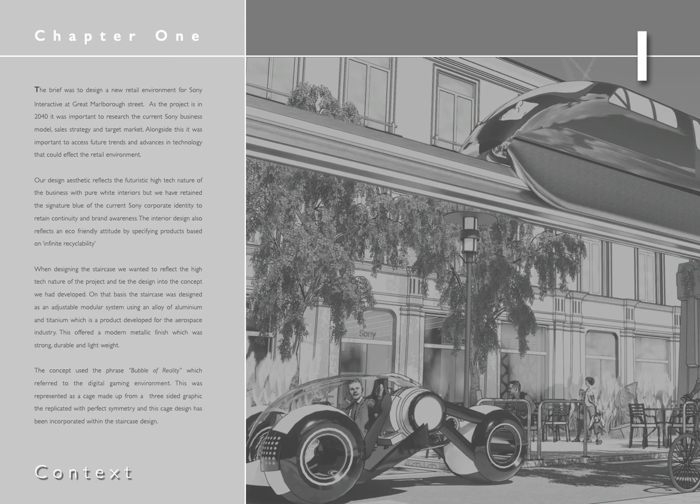The staircase project. As you see, I've started to build up the graphics for the portfolio. I'm putting a context page in here just so the staircase is in context with the interior. I thought it was quite important.

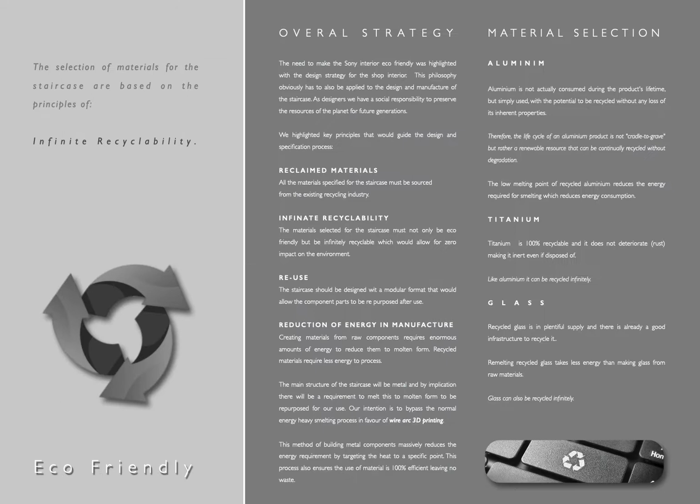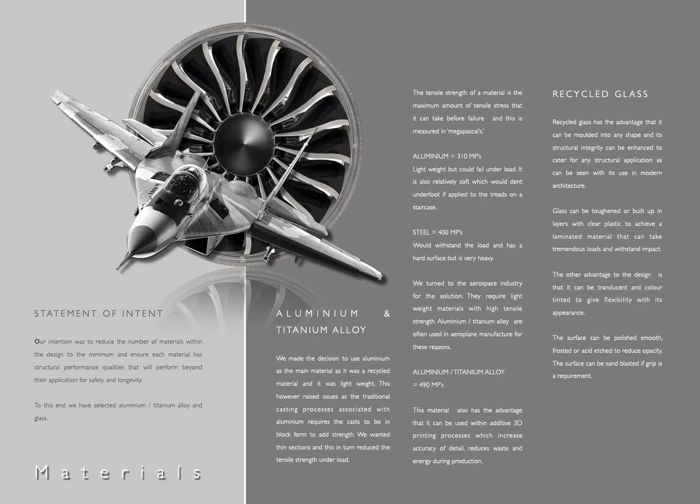Research-wise, I've looked at the eco-friendly elements. I've looked at materials. I'm going for sort of aerospace type materials, lightweight and strong. As discussed, I've looked at the process. So we're looking at the large 3D printer, so I'm looking at designing around that.

Then you told us to look at 2 staircases. I've actually looked at 3. I've added the Foster and Partners staircase for Apple in New York as well, because I think it's quite relevant. So I've done the Aalto, the Mies, and I've added the Foster on as well.

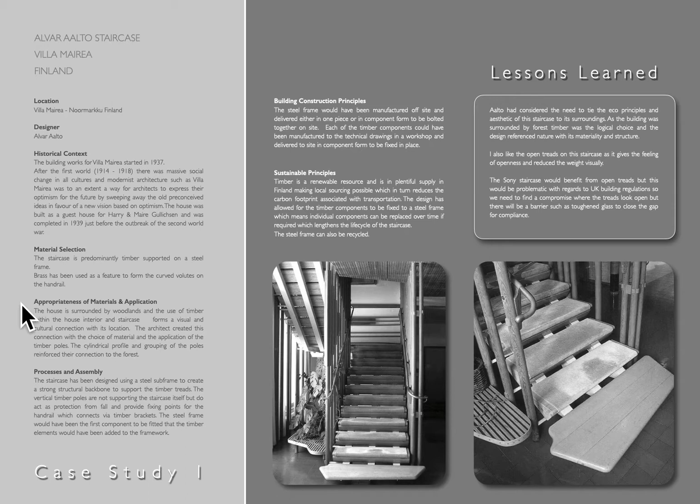So I've just condensed that case study onto that page there and looked at lessons learnt here on the right hand side. So these are the lessons I'm going to take forward into my own staircase, if you like. The same format here for the Mies staircase, and the same format for the Foster and Partners staircase. Then I go into design development.

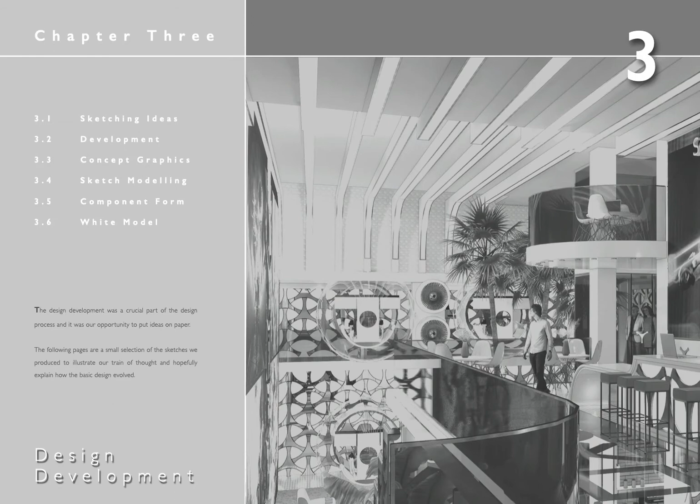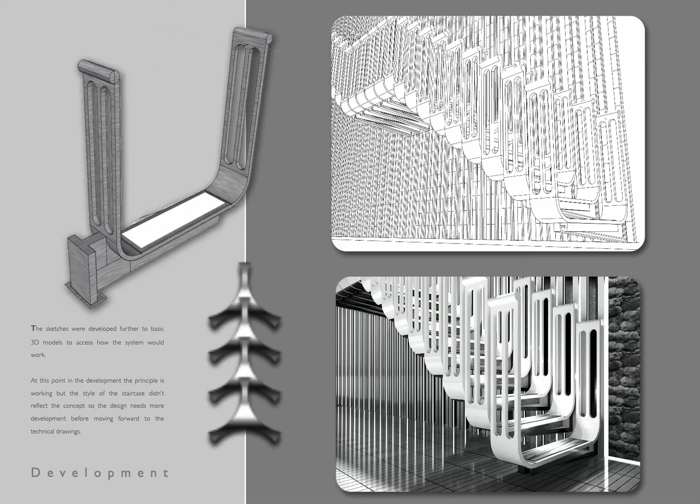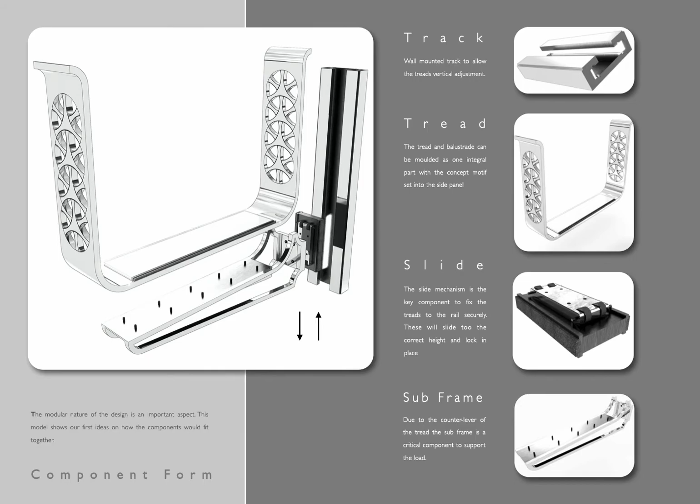I've pulled together the sketches, so I'm just illustrating where I started with these very rough sketches and rough ideas, how that developed forward. And then I wanted to introduce more of this graphic in. So this is one of the early drawings, just showing the graphic on the staircase, and ideas on how the staircase would be assembled. And then I've put a white model in just to show the outline of the staircase

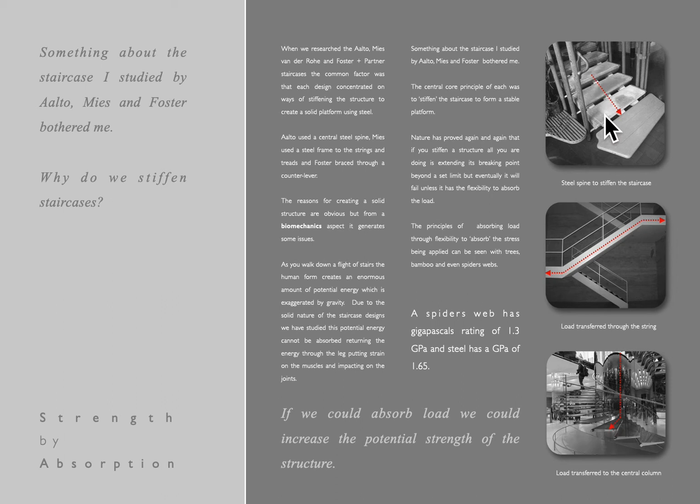within the room. That was the point I was more or less going to finish, to be honest with you, but when I went back and looked at the research on the Mies and the Aalto staircase, and even the Foster staircase, something kept nagging me. And it occurred to me that the one real common feature was they were all stiffening the staircase up. Aalto here was stiffening up with the steel beams behind the steps. Mies was forming this sort of brace with these solid steel structures, and Foster was using this cantilever technique.

And it began to occur to me, is stiffening a stair a good thing? It sounds sensible, but when you look at the biomechanics of it, you've got an awful lot of potential energy as you walk down the stairs. Because you're on a stiff staircase, it's got nowhere to go, so it comes back up through the leg, through the muscle, through the joint. And it seems very counterproductive.

If you look at a gym floor, for instance, it's sprung. So I came up with the idea of, could we introduce some kind of spring into these steps? Not enough to make it feel wobbly, but enough to take the impact and soften it. So I developed that idea a bit further.

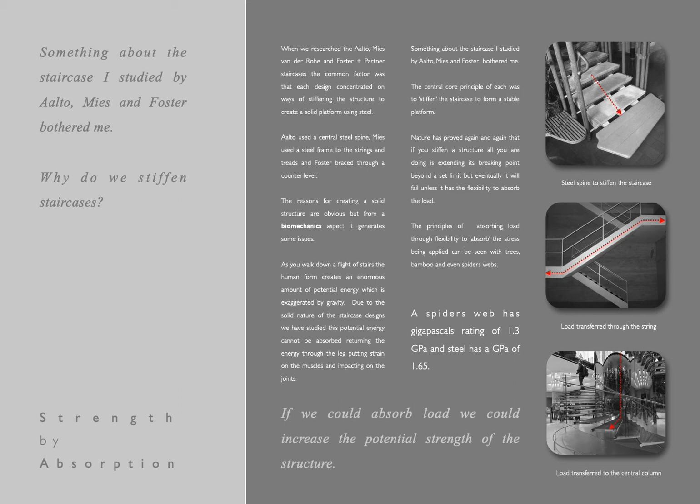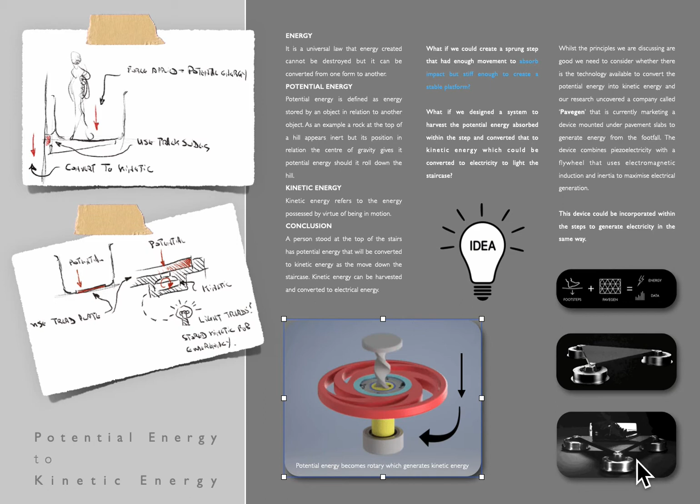Sketching ideas here, I thought, well, if we can take something that absorbs that kind of energy, why can't we use that energy? This is a very basic spinning top. If you put that underneath a tread, so that as the tread came down, we got that rotary motion, we could turn potential energy into kinetic energy. So, why not? Did a bit more research.

I found this company called Pavegen. Pavegen are already doing it. They've got these micro generators fitting underneath the pavement, so as people walk along the pavement, they actually generate electricity. I thought it was a great idea. It's already on the market, so this is something I could do.

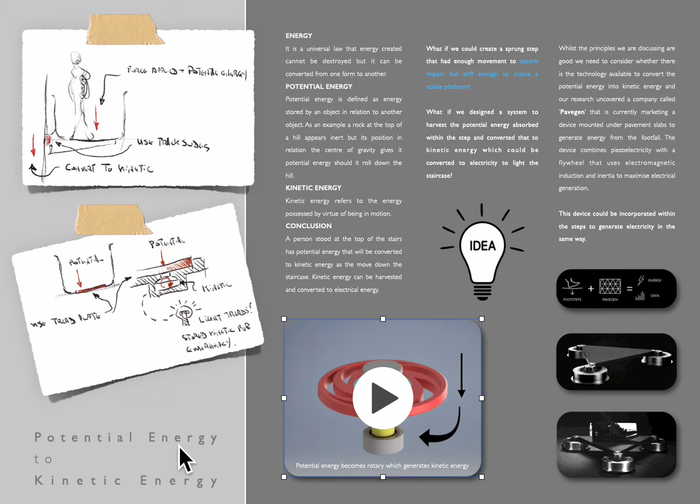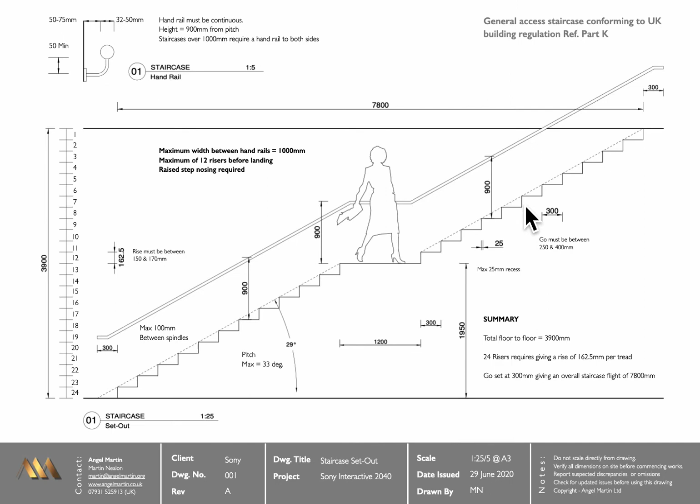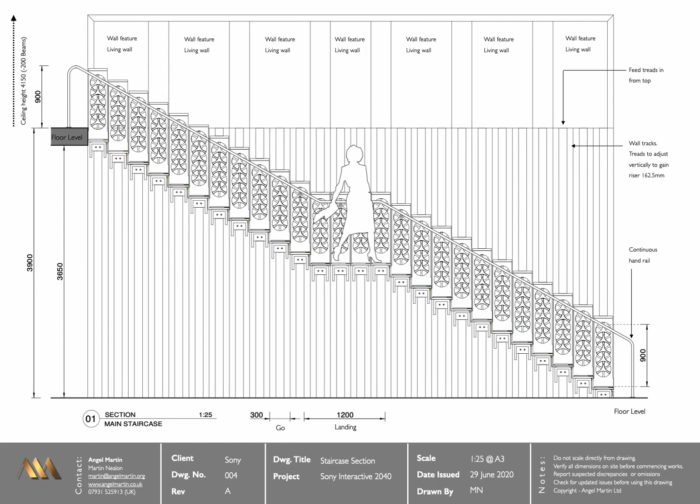So going forward, I'll quickly run you through the drawings so far. I've done one drawing here condensing all the relevant building regs information: the stairs, the rise, the go, and the various regulations. Done the main plan. Elevation, I've still got to add notes to these. A lateral section through. More elevations.

I've solved the riser problem by putting a glass riser in here, so that we can conform to regs with this staircase. The whole thing's had to virtually be redrawn. It's amazing, all these little alterations. It was just easier to redraw the damn thing.

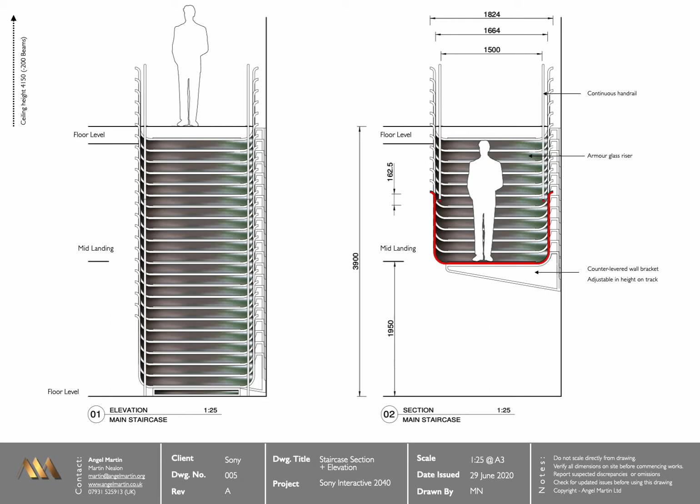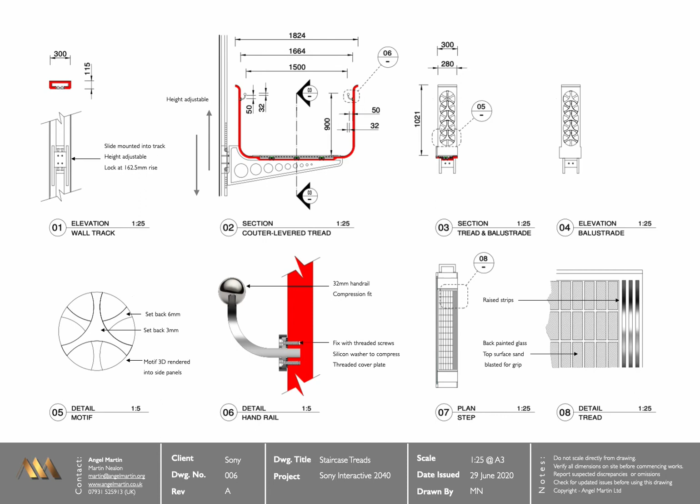Done quite a few details there, so I'm starting to see how we could use sandblasted glass here, how we could raise the treads at this point, how the handrail would work. That's looking at the idea of converting potential energy to kinetic energy. So we spring-loaded this part of the step here, and we could have that generator underneath. That's the glass riser in the back, which is backlit. So I've done quite a lot of detail on how we could actually do it. That needs developing a bit more.

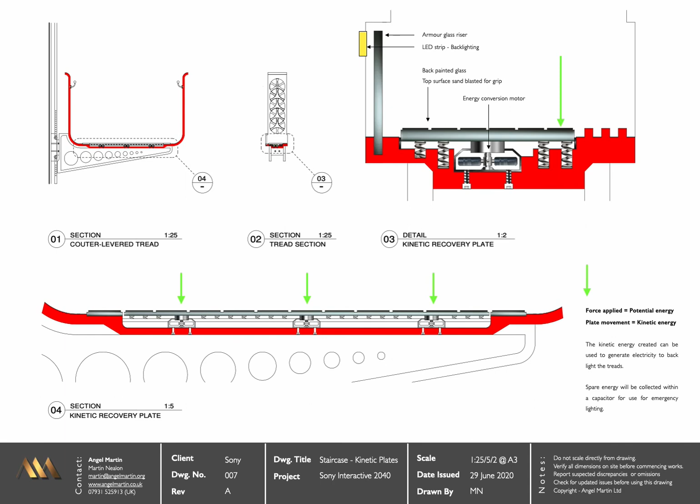I worked at the model. I've sent that away for 3D printing now. So that was the 3D printing model I've sent the guy. More details on this slide mechanism that I designed, because I want all these stairs, instead of being fixed, to adjust into position so that it's very much a modular system.

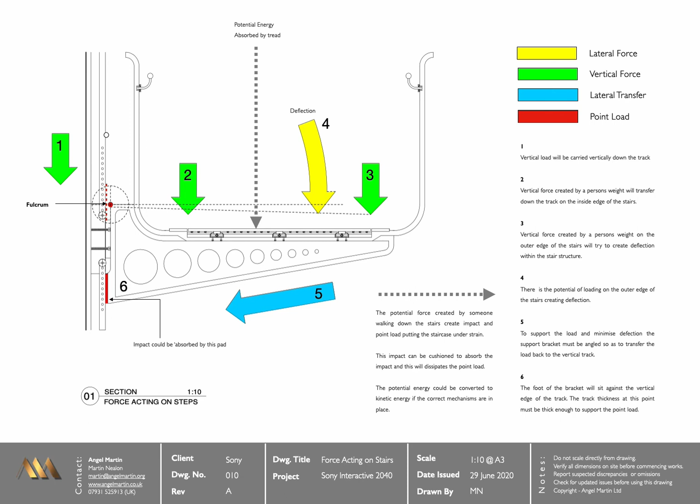I've looked at all of the loads, the load on the track, the load on the outer edge, how that would cause deflection, how we need to redirect that load back through the brace underneath. I'll probably take the lift out. I presume you don't want that.

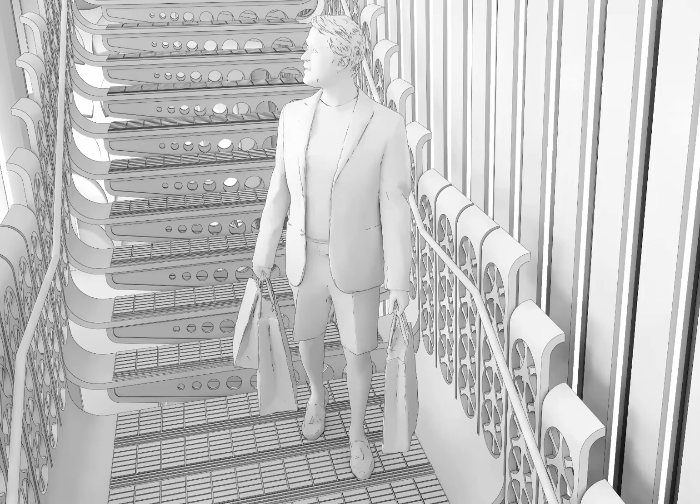And then, just in the last minute, I've started to do a white model. This staircase has been completely redrawn now from the original drawing, so this now matches the technical drawings exactly. So white model, and so on.

I started to look at colour drawings. Not totally thrilled with these. They need a bit of work, but the basics are there. You can start to see all of these reflective materials working now. I have to play this back in slow motion.

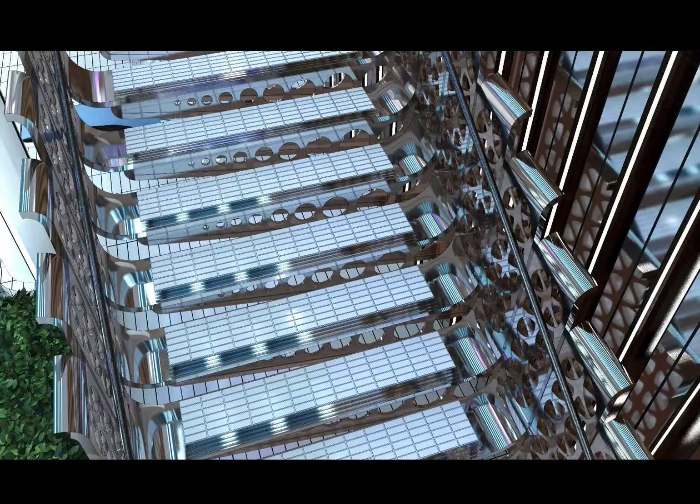And finally, I got the first model back from the printers, so I'm quite excited about this. So we can print this in 3D. Not happy with some of the details, so we're in the process of cleaning the digital model up now, ready for printing next week. So hopefully I'll have these in a couple of weeks. I can start building the foam board model around it.